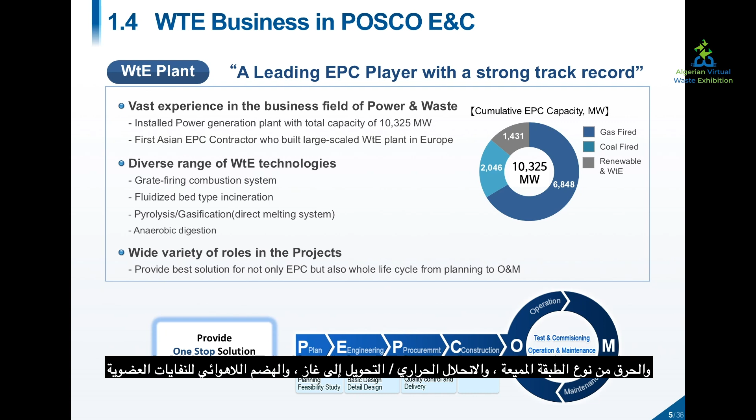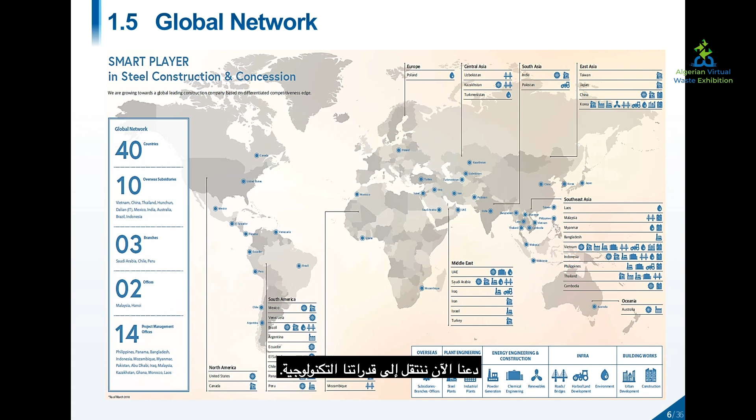This is our global network. We've been working in more than 40 countries all over the world, including Asia, Middle East, Africa, and South America. Now let's move to our technological capabilities.

The most important thing which we should consider when treating waste is the emissions, because we must not produce other pollutants to remove waste. Although each country has their own emission standards, EU standard is typically the acceptable and preferred standard in the world. If you see the regulations between Korea and EU, they generally share similar limits. In both countries, the emissions shall be carefully controlled by up-to-date flue gas treatment systems.

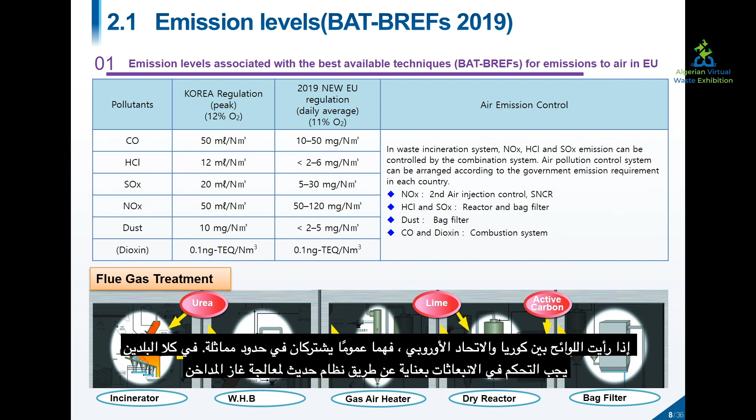According to the new directive, EU is tightening up on emission standards for plants newly constructed. It will be more tightened in the future. Especially the carbon emission will be strictly controlled. If you see the guarantee value of carbon monoxide in our project in Europe, which was completed in 2016, it was max 45. However, it became max 25 when it comes to our second project in Europe started last year.

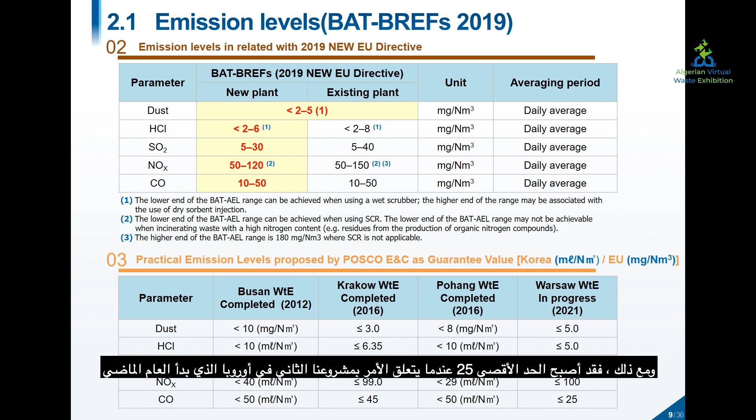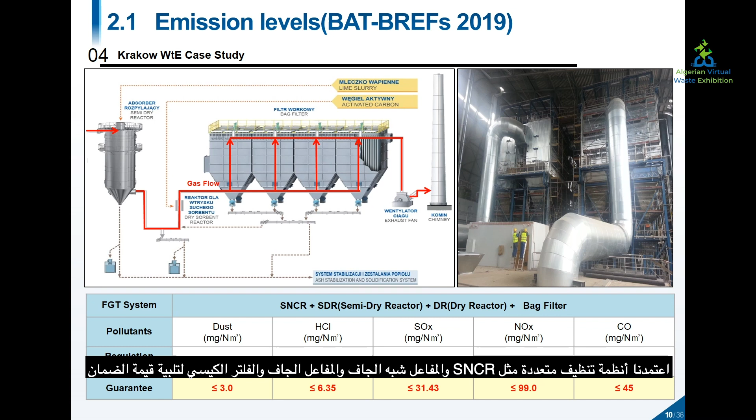This slide shows the flue gas treatment system applied to the Krakow waste-to-energy project in Poland. We adopted multiple cleaning systems such as SNCR, semi-dry reactor, dry reactor, and bag filter to meet the guarantee value. The Warsaw waste-to-energy plant, which is under construction now, has tightened guarantee values for emissions, especially in hydrogen chloride, SOx, and carbon monoxide.

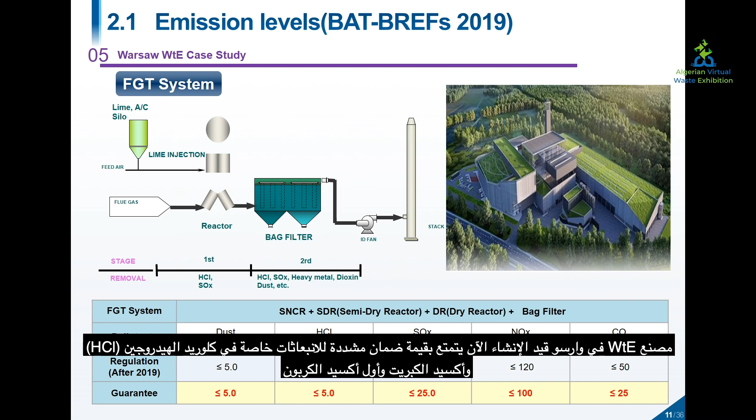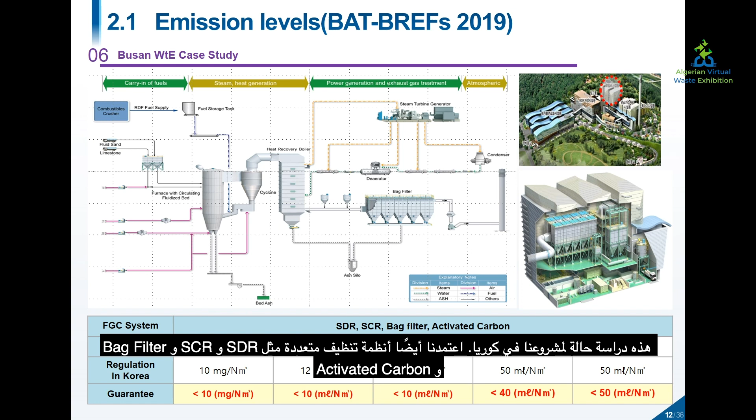This is a case study for our project in Korea. We also adopted multiple cleaning systems such as SDR, SCR, bag filter, and activated carbon.

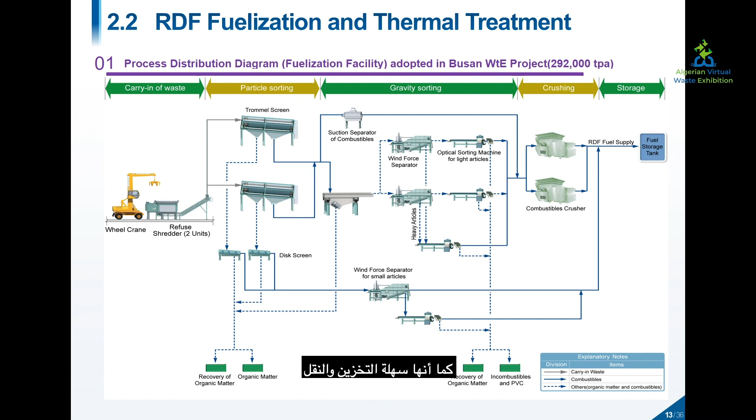RDF fuelization has many advantages. Through multiple sorting systems and crushing, we can produce fluff type RDF which has relatively high caloric value and fewer emissions. It is also good for storage and transport.

This slide shows the fuelization facility we constructed in Korea. Through this facility, 900 tons of waste were treated daily and produced more than 600 tons of fuel, which does not contain chlorine, food, PVC, etc.

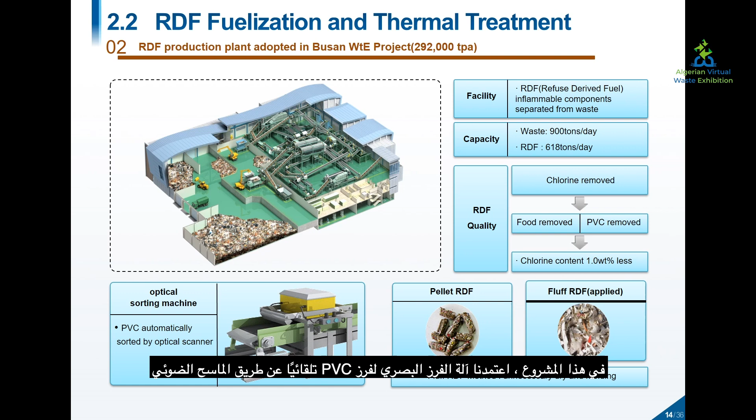In this project, we adopted an optical sorting machine to sort PVC automatically by optical scan. In case of short-term storage, RDF will be stored in the storage bunker for homogenization and will be supplied to the thermal treatment system.

If we need to store RDF for a long time or transport it to another place, it is good to process RDF by compression and packing. In this case, we can reduce the volume by 1/5.

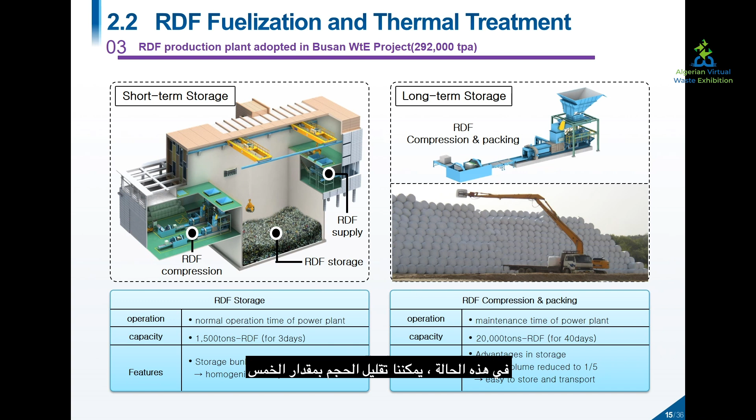So after the fuelization of municipal solid waste, we could have various options in thermal treatment. In the case of our project in Korea, we chose a circulated fluidized bed-type combustion system to produce energy. This CFBC boiler has stable heat recovery for long-time operation.

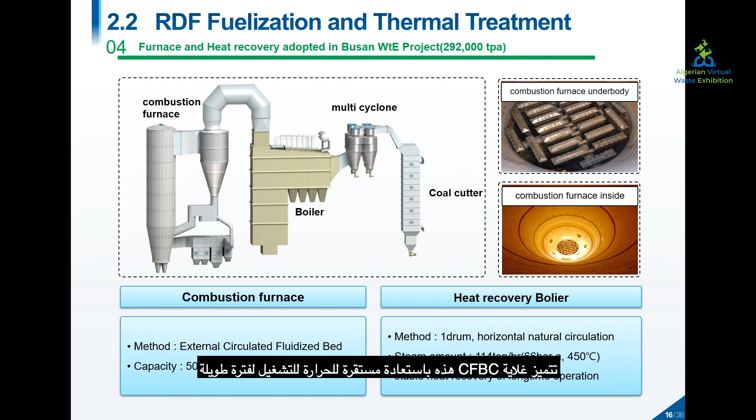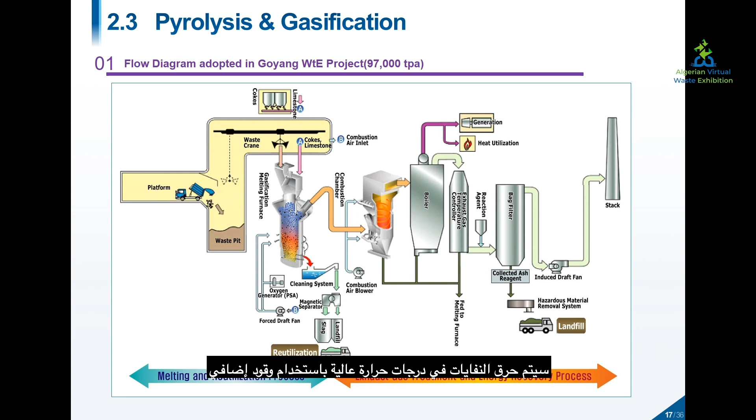Another technology for waste treatment is pyrolysis and gasification. This is the flow diagram adopted in the Goyang Waste-to-Energy project in Korea. In this melting furnace, the waste will be combusted at high temperature with auxiliary fuel.

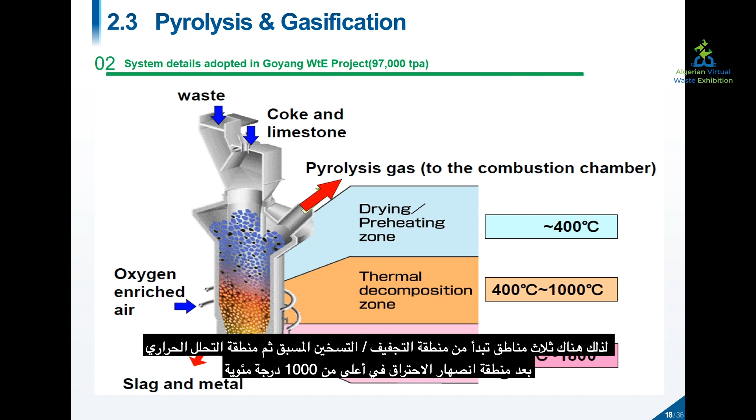So there are three zones, starting from drying and preheating zone, then thermal decomposition zone. After that, combustion melting zone in higher than 1000 degrees Celsius.

Even though pyrolysis and gasification has several advantages, we do not recommend this method because it is relatively expensive and very sensitive to control and operate. Instead, we highly recommend the conventional type, which is grate firing combustion system, because it can have large treatment capacity and satisfy large variation in waste composition and calorific value.

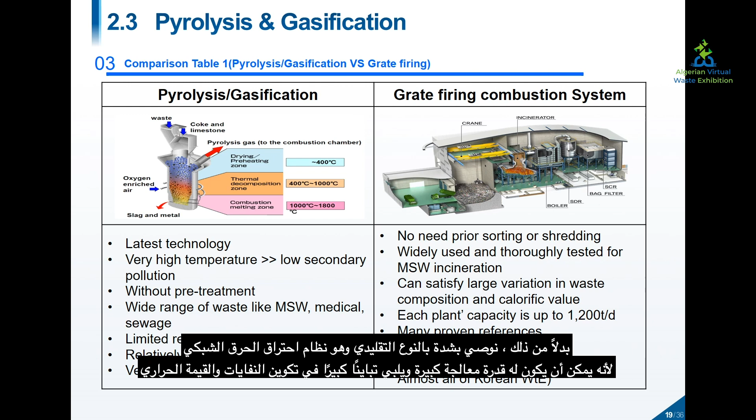This is the comparison table for the various combustion technologies. As I explained, the grate firing combustion system is highly recommended for your projects in Algeria.

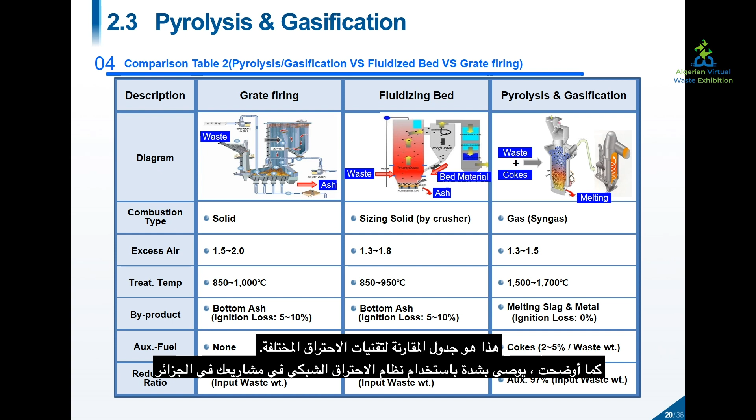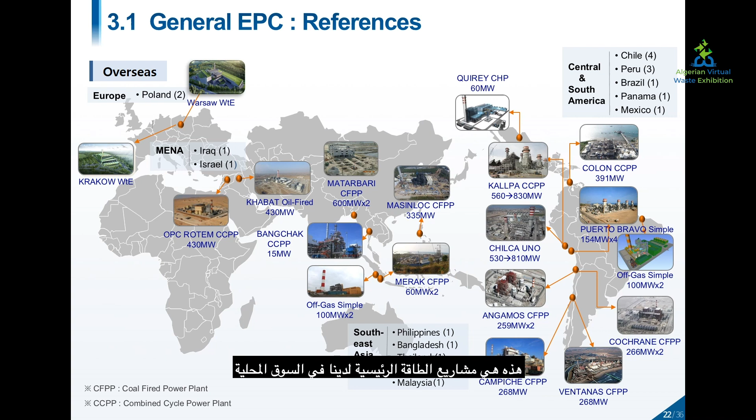Now let's move to our experience. This slide shows some of our experience in large-scale EPC projects all over the world. Those are our major power projects in the domestic market, including waste-to-energy plants. Those are our projects in Europe.

Krakow waste-to-energy plant was already completed in 2016 and is under operation successfully. It treats 220,000 tons of waste annually and is producing more than 10 megawatts of electricity, as well as 35 megawatts of thermal energy for district heating.

On the right side of the slide, you will see Warsaw waste-to-energy plant under construction now. It will be completed in 2024.

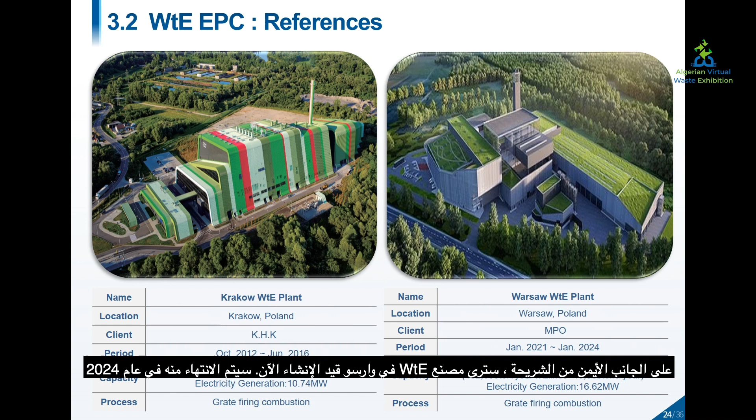This is a newspaper article published in Poland. It says Posco E&C is the only company who can complete the project on time, compared with other ongoing projects started simultaneously.

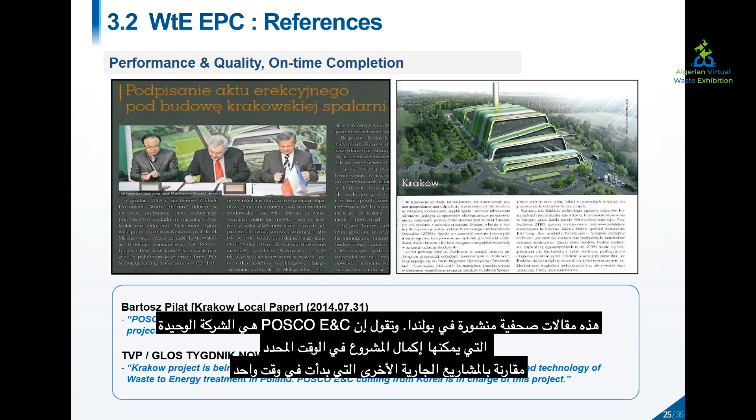This is a very interesting point. A waste-to-energy plant shouldn't be an unpleasant facility to the public. So the concept design of this facility was established by a design contest among citizens of Krakow.

As you can see here, it looks like an art museum, and it was awarded Poland's Building of the Year in 2016. Until now, many citizens and students are visiting this plant for field trips and tours.

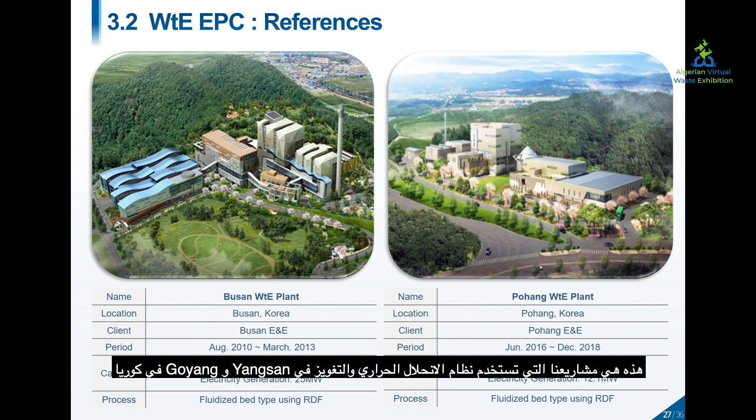Those are projects in Korea using RDF fuelization and CFBC boiler. Those are our projects using pyrolysis and gasification system in Yangsan and Goyang in Korea.

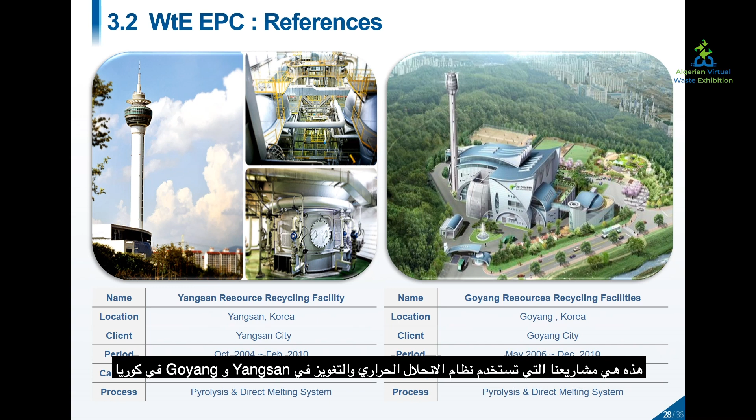This table shows our references in waste treatment and waste to energy.

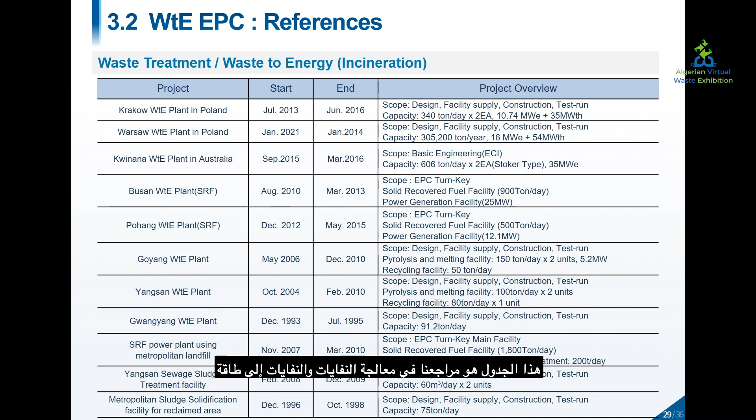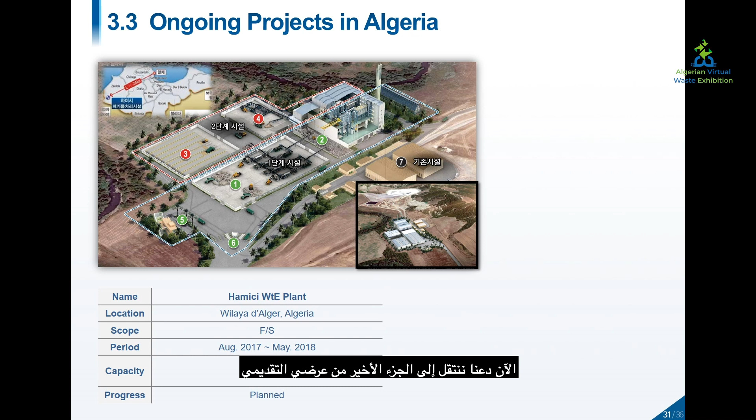Now let's move to the last part of my presentation.

Currently, all of us are living in an era of decarbonization. Renewable energy and eco-friendly treatment of waste are essential and inevitable trends for the international community. EU emission standards are getting stricter, so you need the right partner to develop a new waste-to-energy plant.

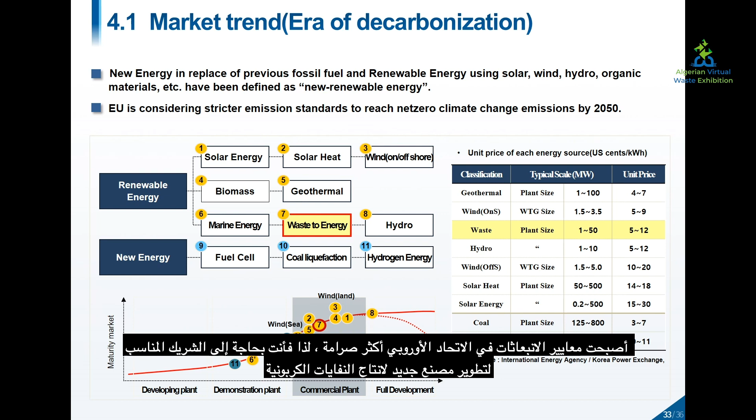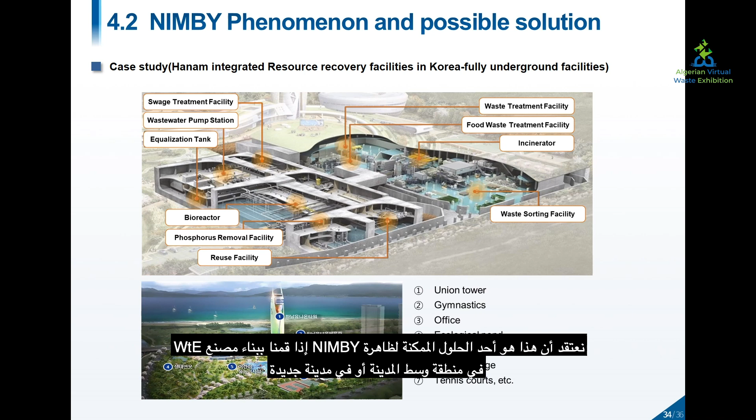Also in Korea, especially in the new cities, recently developed ICT-based waste management systems were adopted. For example, our head office is located in Songdo New City in Korea, and there is no waste truck going around this city's downtown area because the automatic collecting system is installed underground, and there are waste drops in each building which transport the garbage into the waste station by vacuum system.

The collecting data is monitored by the Ministry of Environment of Korea in real time. This should be considered from the design phase of new cities, and the underground facilities should be installed before the construction of buildings and superstructures.